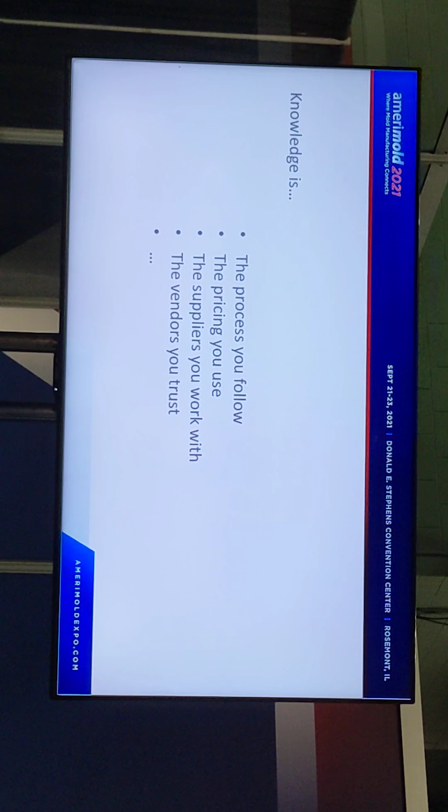So knowledge makes up the process you follow, the pricing you use, it makes up everything. The suppliers you work with and trust. Everything comes from the knowledge you have built over time, the knowledge your bosses have built over time. This is where it all comes from.

Speaking of process, let's talk about process for a minute. Let's say you get a new job. Here we're talking about mold, so we're going to talk about the process of manufacturing a mold. When the mold comes in, you start with the design. That's where every mold starts. You're going to start by having a preliminary design. You're going to review that preliminary design with your customer.

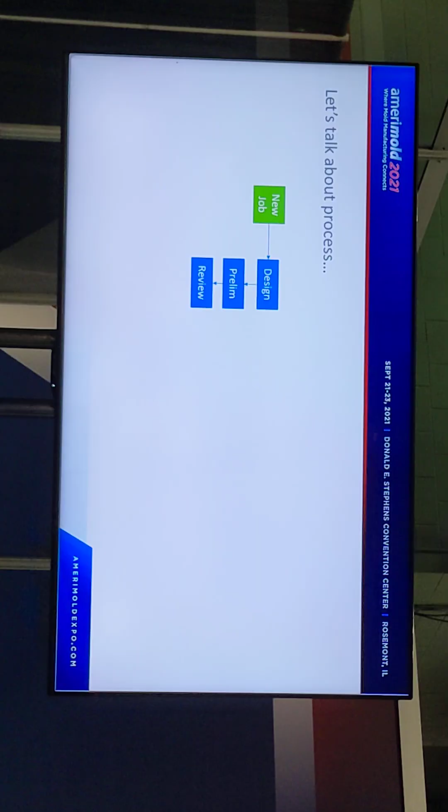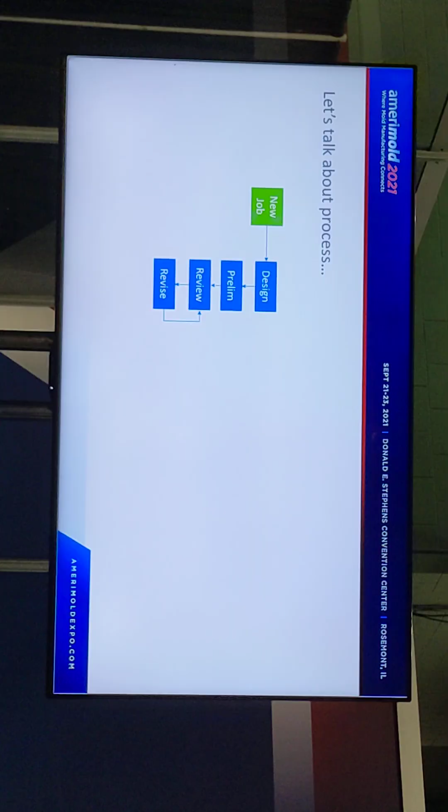Your customer then is going to revise it, because that's what customers do. They can't make up their minds from day 1 to day 2. We all know this. That revision process goes back to a review, then back to a revision process, back to a review, and this runs in a circle for a while until everyone agrees that the design is ready to use. At that point, you get to deliver a design.

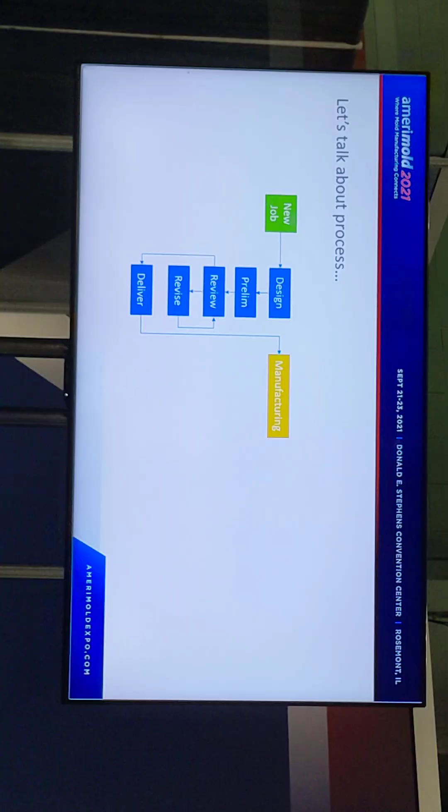Where is that design being delivered? It's being delivered to whoever is manufacturing this mold. It could be your own internal organization. Maybe you are doing this with an external manufacturer, who knows? But in that manufacturing process, and I'm not going to hit all of the points of manufacturing a mold, just big ones, you're starting with ordering materials, ordering your consumables, right?

You are going to prep everything you possibly can for heat treat, get it out to heat treat. You're going to bring that back in, start finished machining, assemble everything, and then, God willing, you're going to deliver. And at the end is a payday. At least that's what we all hope for.

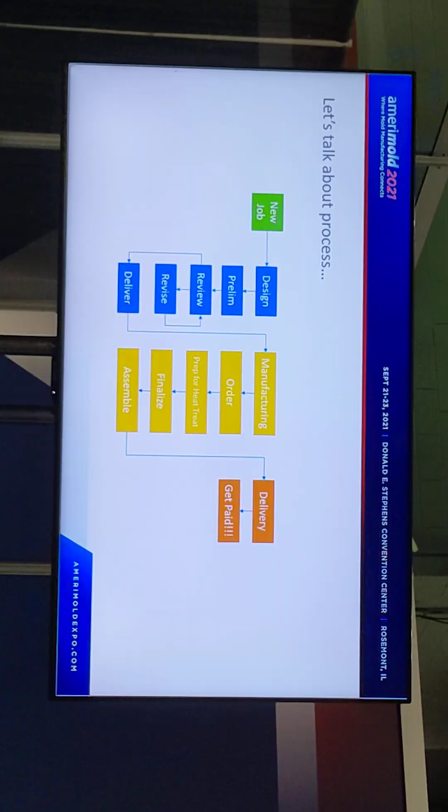We get paid. Now, in reality, what happens in that process when there's a breakdown, when something falls apart? And that's really why we want to talk about automation, because we want to stop simple elements from causing hiccups in that process of start to finish mold making. So let's take another look at this process. Again, we're in this design, right?

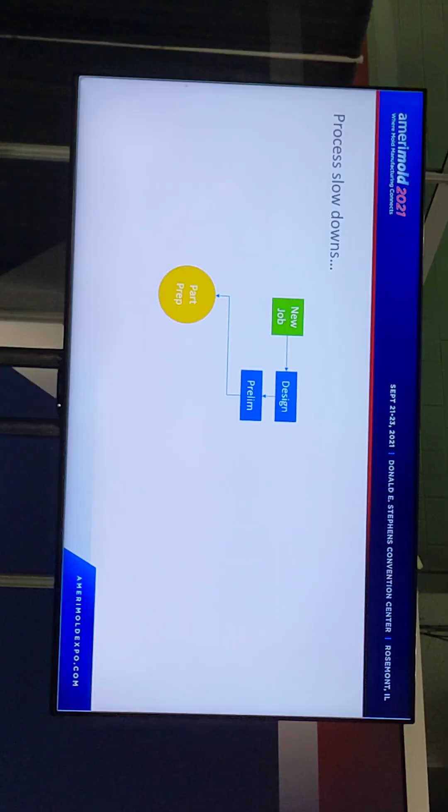Let's break down the preliminary aspects. What do we do when we're doing a preliminary mold design? We start with prepping the part. I don't care who you are. You import data from your client. That data either imports cleanly or it doesn't. You then have to fix the data, or you're checking it, making sure there's proper draft angles on it, it's ready for moldability. You have to make modifications, whatever. This is your preliminary part setup.

After that, you begin developing your core cavity blocks, right? You do the split, you develop the inserts, the sub-inserts, the action inserts, everything that makes up the meat and potatoes of that mold. Once that's done, then the mold design can actually begin.

Now, what do I mean by mold design? I mean the full-on mold design. We're talking your mold bases, your ejector pins, your water lines, everything that goes around the mold to make the mold function. That's where we're going to look with automation today, okay?

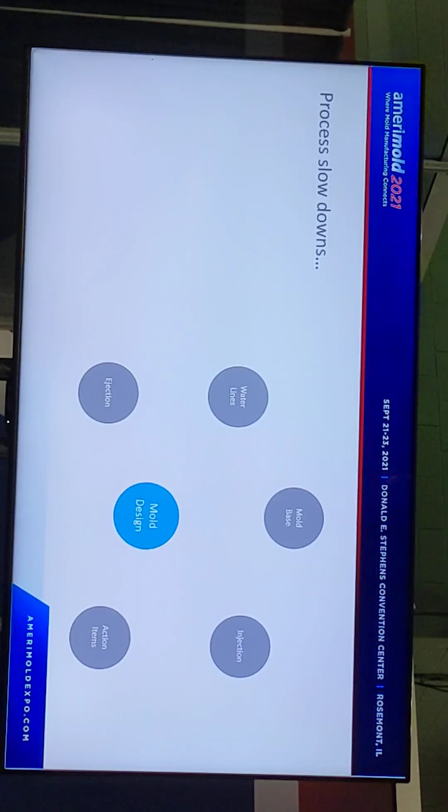So if we take a look at mold design, we break it into a couple of key areas. You have mold base design, you have the injection portion of the design, you have the action items, the ejection side, the water lines, and so on. If you look at each of those objects, each of those individual items have their own idiosyncrasies that you have to follow, right?

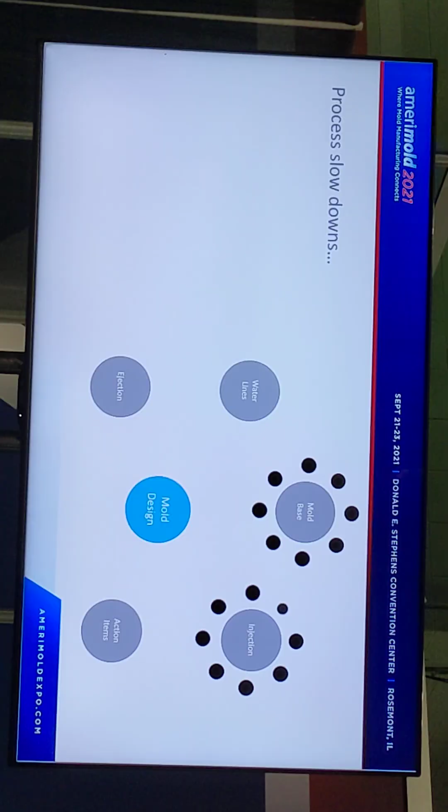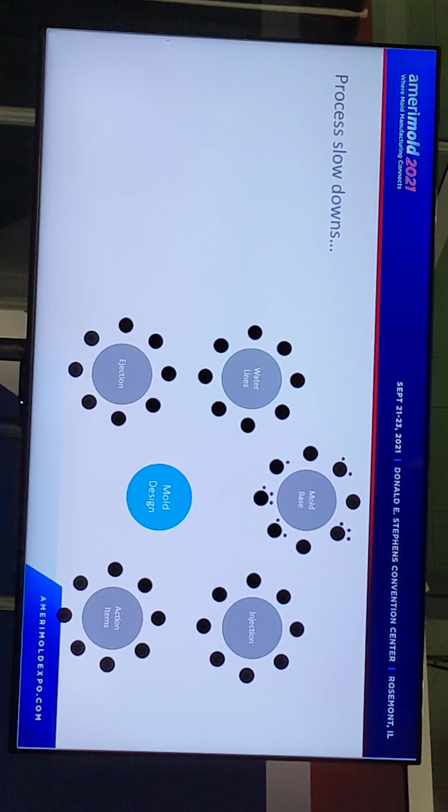So in the mold base, we have to design plate work. With the plate work comes componentry, screws, pins, bushings, things like that. Each of those pins and bushings come with the manufacturing process that's associated with them, right? So all those little things have little idiosyncrasies of their own to deal with. And this is where designs can break down some.

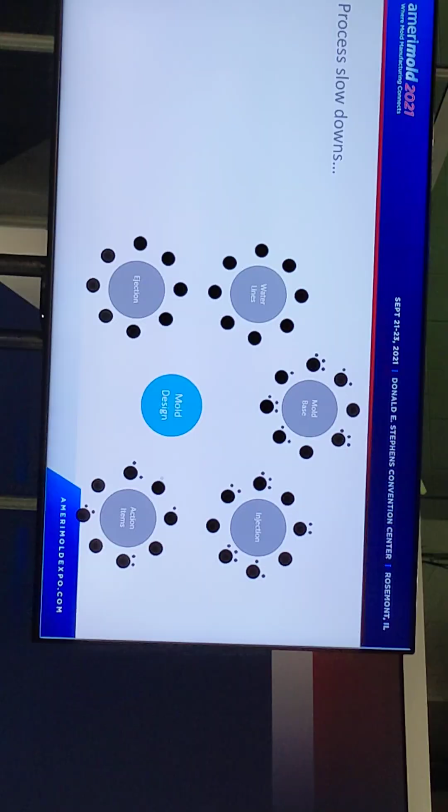Because you'll have designer A that believes they should put this type of clearance on this component, and designer B puts this type of clearance on this component, which leaves the manufacturers on the floor that have to build it with their hands up in the air, not knowing which are the right numbers they should work to, right? And at the end of the day, both designers are right, because it's just clearance.

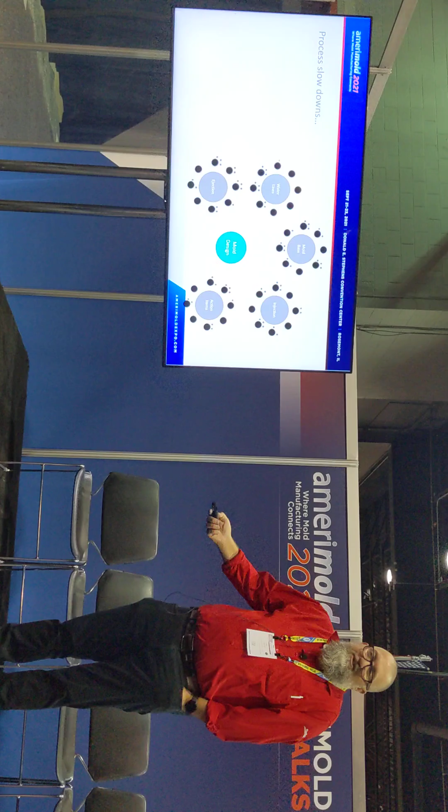What happens now when we enter the world of automation? So now we're going to talk about automation a little bit, how it works and why it works, and why you want to be using something that is capable of automation in your everyday mold design life. Automation should be used to minimize mistakes, right? Or completely remove them. And I'm going to give you some samples here in a few minutes to help you understand what I'm talking about.

It should speed up a given process, minimally, okay? It should remove personal opinions. And yes, I'm saying that every engineer has personal opinions. Every engineering manager has the ultimate opinion. And I'm not picking on any of you guys to be mean. We all have our opinions.

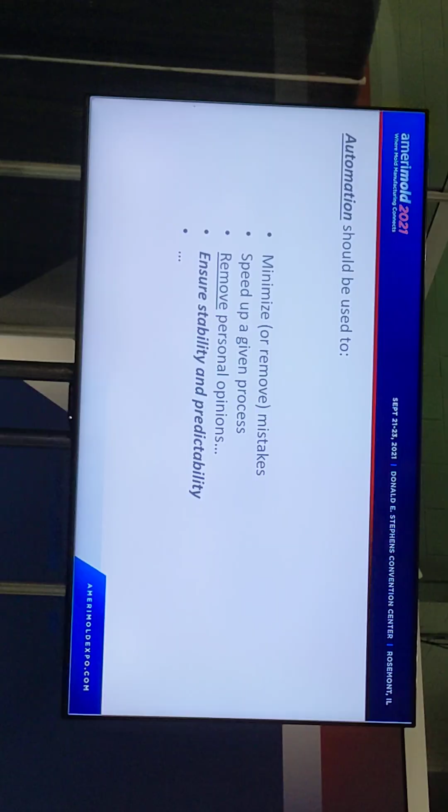But at the end of the day, whose opinion matters? The company. You should be following the company's opinion of how this should be done, period. And focus your engineering talents on the hard aspects of the design, okay? The other thing that's interesting about automation is it ensures stability and predictability. Because if we know these rules are being maintained, we can predict better when we're quoting jobs, right?

Cool. So automation works by capturing company knowledge. There's that word again, right? We have a way of doing something, so we want to capture that and make it reusable. It could be as simple as how an item is positioned in the mold, okay? When I put my stop pins in, I want them positioned like this and this from here, period. That's the way we do it. And moving forward, that's the way we're always going to do it. When clearances are used and so on.

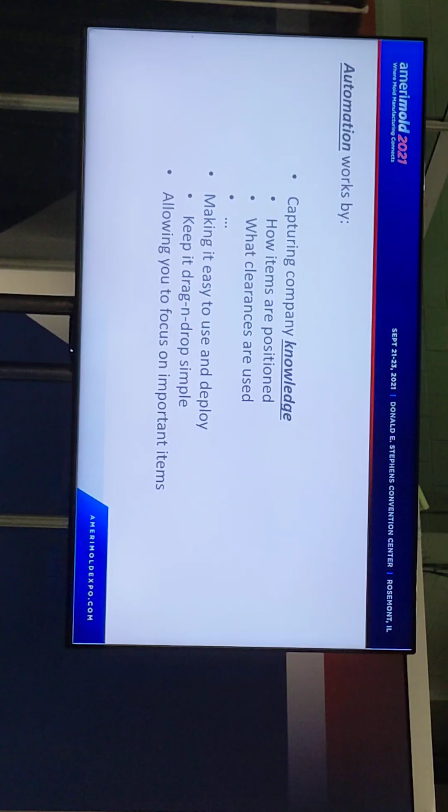It should be made easy to use and deploy. If it's not easy to use and deploy, are your engineers and your employees going to use it? No. They're going to fight you on it. Okay? Now, let's talk about other items that help in automation.

Libraries. I'm sure we all have libraries of things we use in our everyday engineering. For example, here I'm just showing a bunch of libraries of materials. I've gone through in my samples and I said, okay, I use material A, material B, material C, it can be H13, S7, whatever. I have it set with all the properties that we always document, and it's done once and forever. I have the suppliers I order from automatically listed in there, so when I build my bill of material, everything's done, and it's perfect every single time, okay?

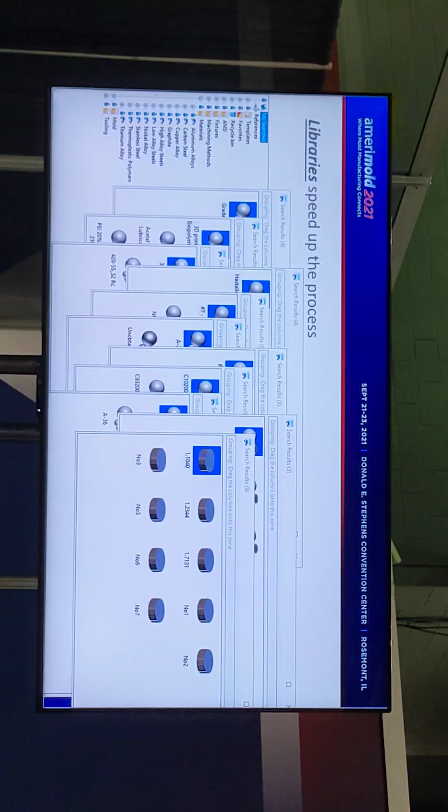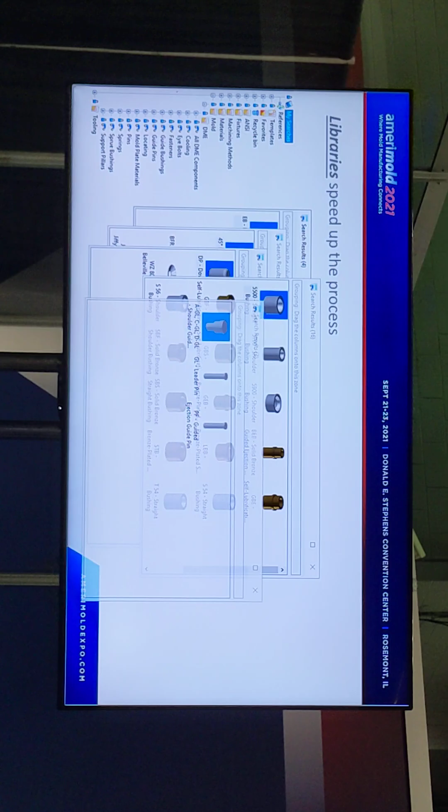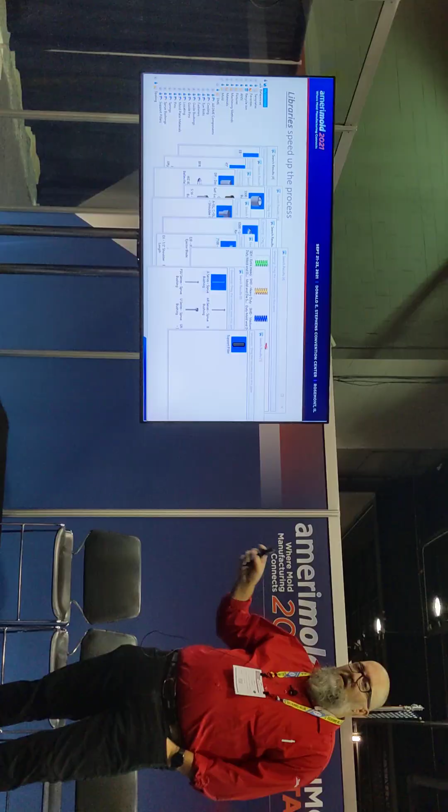We'll talk about screws in depth here in a minute. Then you have libraries linked to a given supplier, and here I think I'm using DME. Could be Hasco, PCS, Progressive, Misumi, whoever you guys use. But you want to have access to these components, and more importantly, to the components' manufacturing processes that are associated with them. We're going to talk about that here in a second as well.

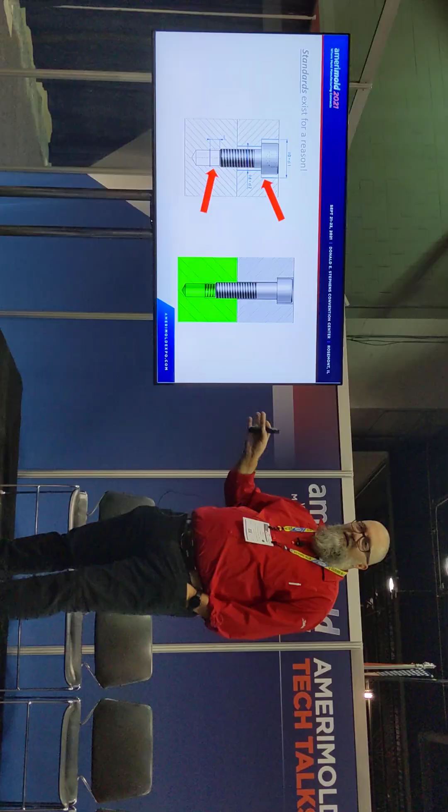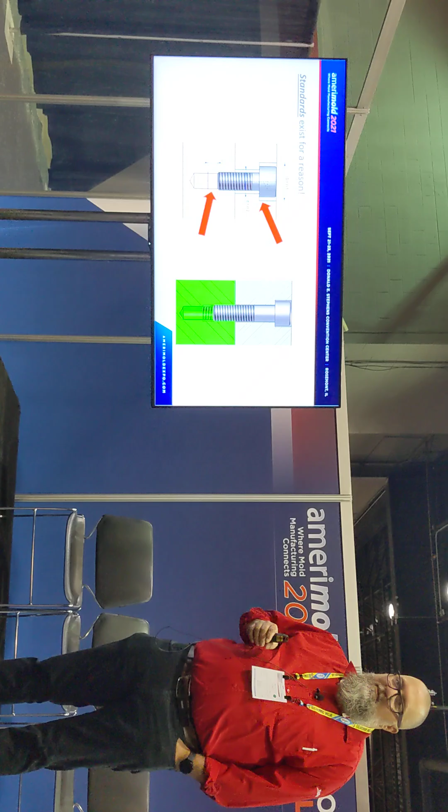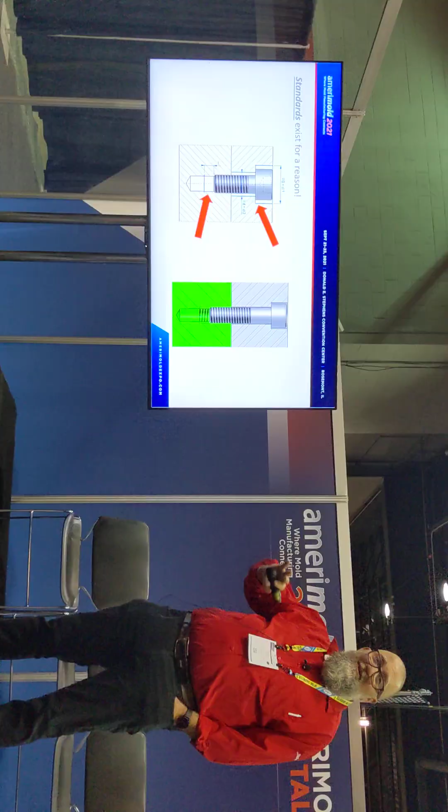So, how many of us have seen this before? Silly question, right? It's a socket head cap screw. It is the basic building block of the mechanical world. How many of us have designed something in the past where we had to type in the clearances for the standard clearance hole, the tap hole diameter, everything, because you had to document this for manufacturing. And this is silly because when's the last time a quarter 20 changed? Or half 13? It hasn't. It's a standard for a reason. So why is it that everyone insists on taking the time of typing this stuff in manually? All that does is add to the time.

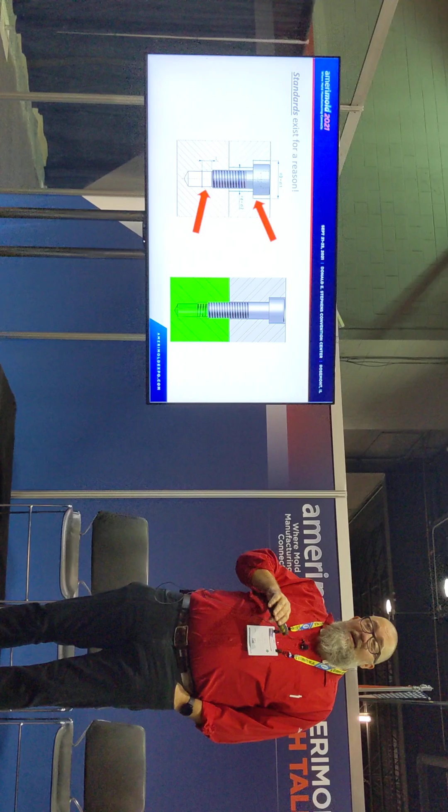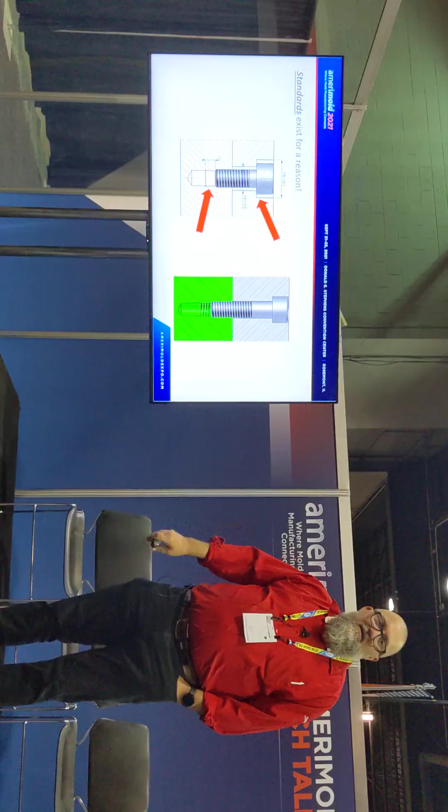What you really want to be doing is thinking about what clearances your company wants to work to. Okay, you can use the standard ANSI or ISO or DIN or AFNOR clearances, or maybe you have your own strategy on how you need to manufacture these things. But set it, forget it, move on. And when you set it and forget it, make sure it's using values that the downstream manufacturing people can actually use. Okay? Don't round values on the engineering side thinking, oh, the guys on the floor, they know what I mean. They may know what you mean, but their automated software sure as hell won't. Right? So let's have a look.

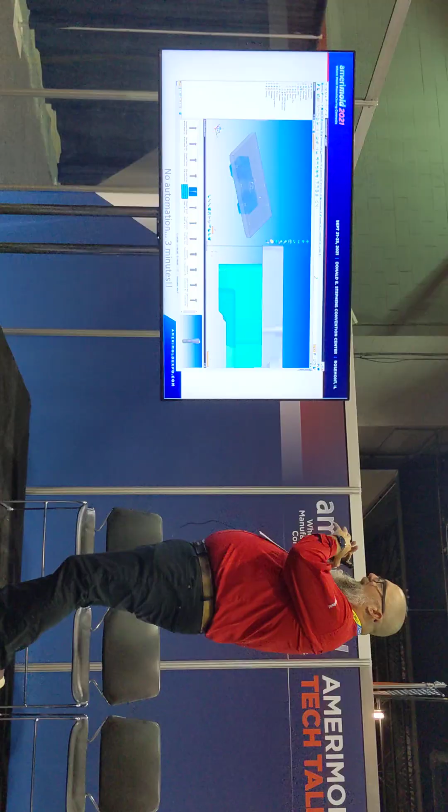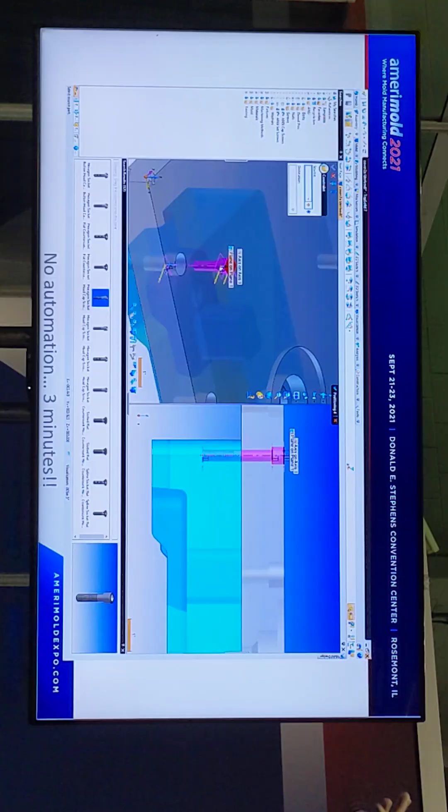So in this video, I'm going to show you adding a screw with no automation. Okay? And it's pretty exciting. You're going to see what engineers do today in most engineering environments. If they have access to a library, they're finding their component, they include it in their assembly, and now they're going to start positioning it. And this is super duper exciting, right? It's not. We've all seen this type of work before. At the end of the day, what's happening is, you can see, positioning is happening. I'm orienting my screw. I'm going to select the correct length for this. Okay? This process is going to take about 3 minutes. It's a good thing you guys are sitting because it's extremely boring to watch.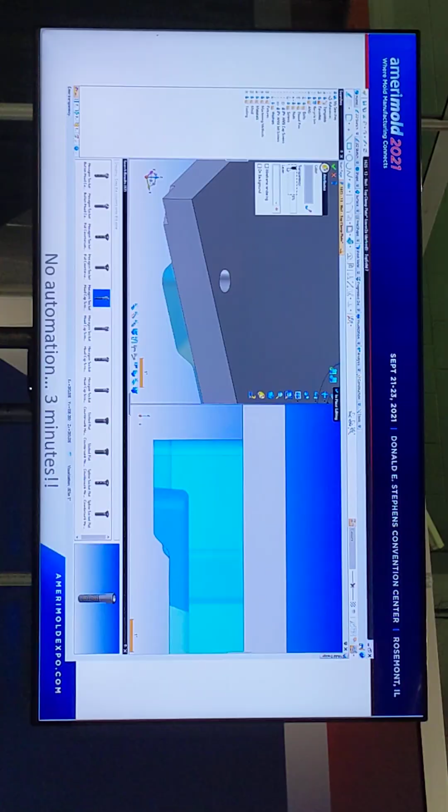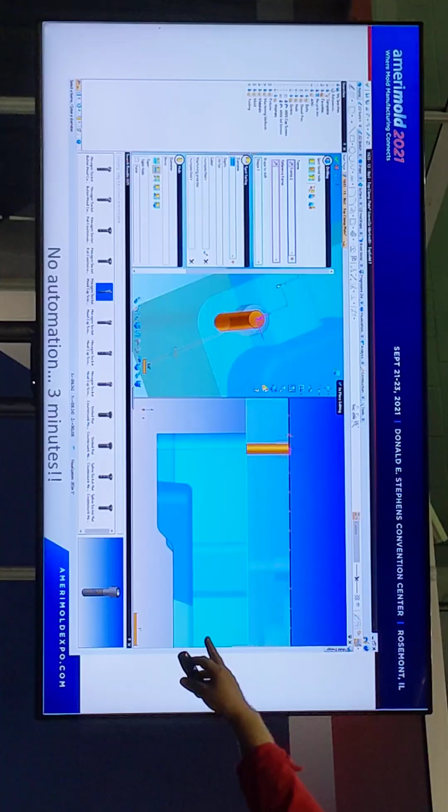At the end of the day, once this is positioned, that's great for the component, so that'll update our bill of material, but now we have to go and modify each and every plate that screw passes through. Okay? Depending on the software you're using, you have to maybe remember what the right counterbore hole diameter is for that size screw. And you have to remember what the right clearance hole is, what the right tap diameter is, and so forth and so on. And here you can see, it's exactly what I'm showing. It's a manual process. This is one screw in a design. How many screws go into a typical mold design? 200? 400? It's quite a big number, right? And so if we take a look at what I wrote down here, it's 3 minutes to do this process for an experienced user. That's a long time to add a screw.

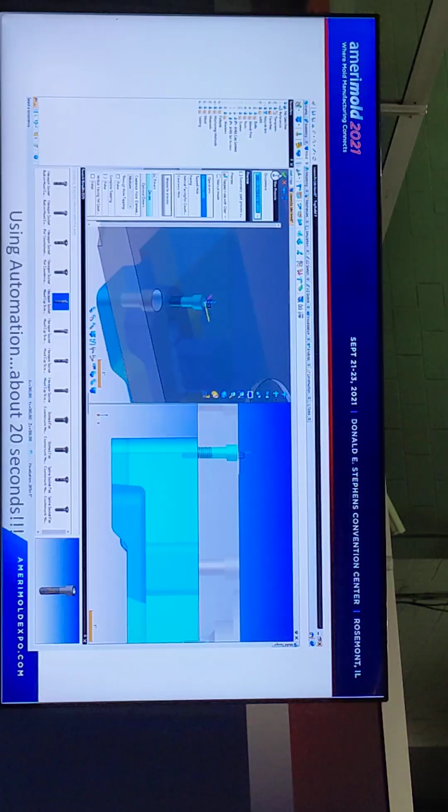Now, let's look at it using automation. So if you use automation and you capture your manufacturing process in it, your user should be able to more quickly locate and identify the screw. So here, I'm positioning it right off the center of my cavity block, off the back face of the plate there. I select the face I want to attach it to. The software automatically picked the right length. I click OK. The clearance holes are in, the drillings are done. It took 20 seconds. I'm not a smart man, but 20 seconds seems faster than 3 minutes, right?

Let's take it to the next level. What about making a change? Because again, remember those changes? Engineering manager comes in, the customer comes in, whatever. You know, Bill, why did you use this size screw? I don't know, it seemed good. So you have to change it. In a non-automated environment, okay, you're gonna go make that change.

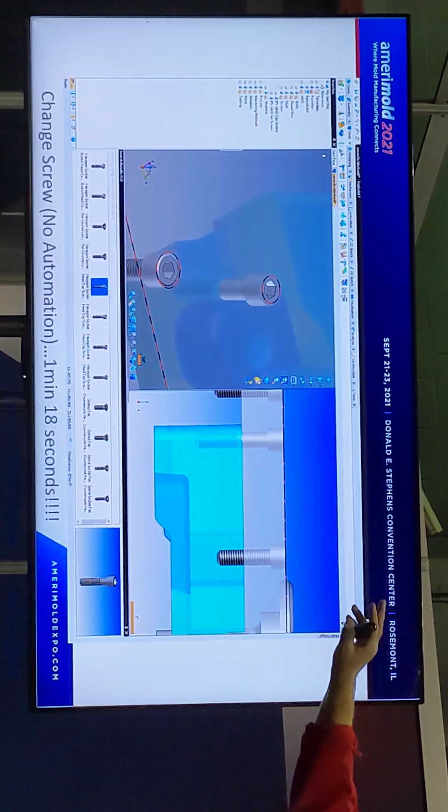It takes 1 minute and 18 seconds to go pick the new library component and then go manually update the correct drilling sizes. And is this a good use of an engineer's time, right? Again, we're just dealing with socket head cap screws here. It is not exciting. Nobody wants to be a designer to put socket head cap screws into a design.

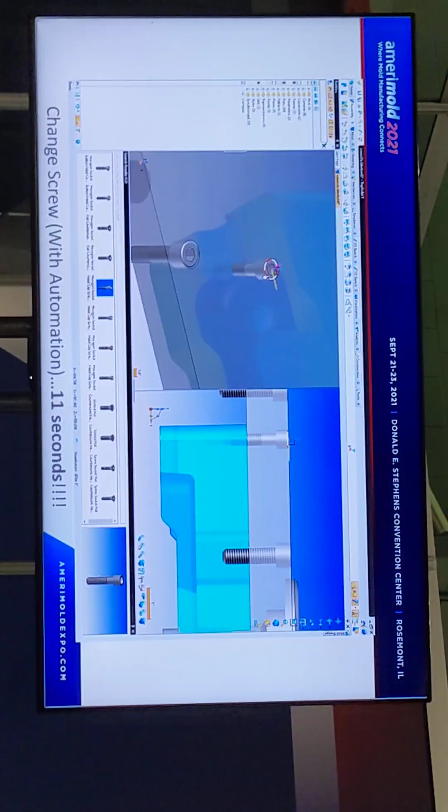So, let's look at the automation side. You can see the increase right there. It's 11 seconds. All I'm going to do here is come in and choose the different diameter I want. The automation is capturing, because it already knows the thickness of the plate, it knows everything. It has everything it needs. All it has to do is change the sizes and the clearances and the drillings. 11 seconds, a little bit faster.

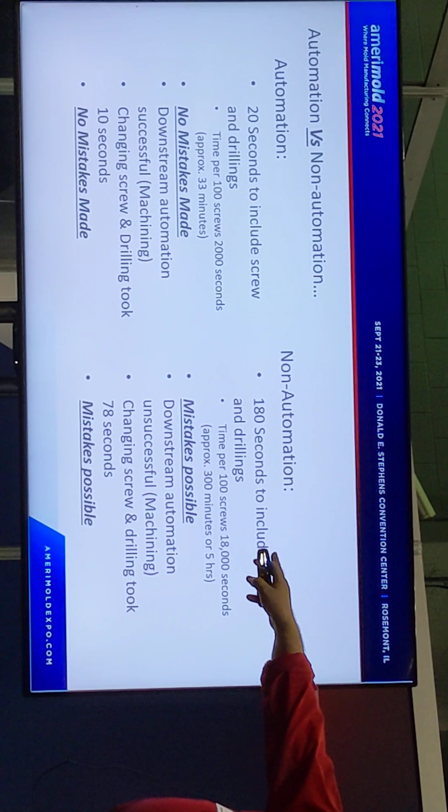Again, let's talk about the reality of mold design now. So, in an automated world, 20 seconds to include a screw versus 180 seconds. Okay? If we take 100 screws in a given design, you have 2,000 seconds or 33 minutes worth of work using automation against 18,000 seconds or approximately 5 hours of engineering time on screws alone.

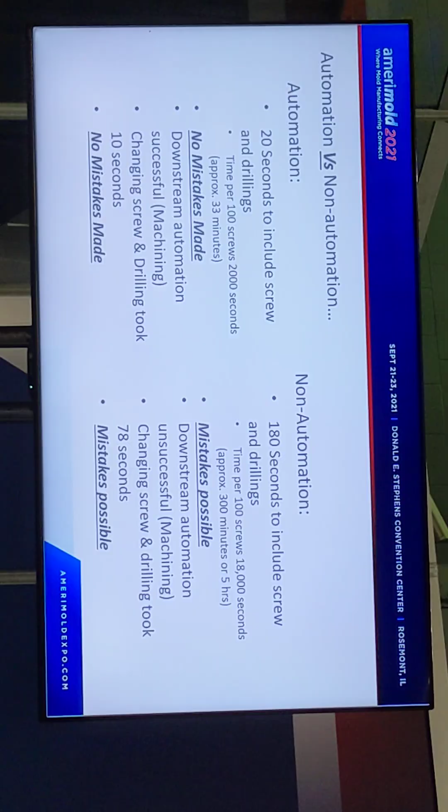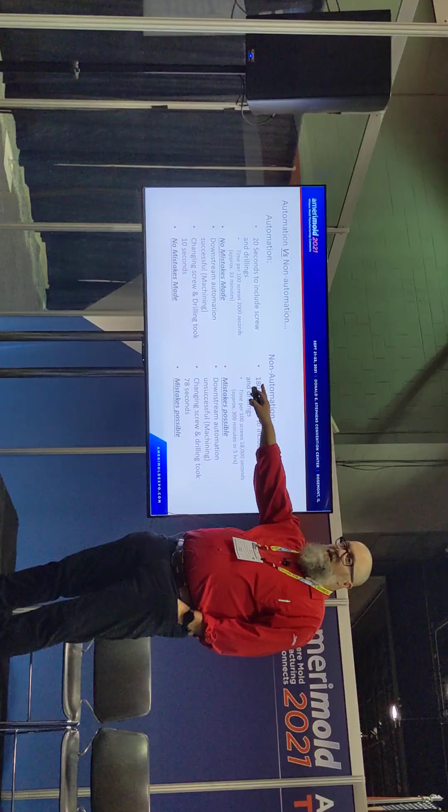Nobody wants to think of this when they're thinking about mold design. They don't want to think my engineers are wasting 5 hours putting screws into the design. But guess what? It's the reality when you are not using an automated platform. Okay? And again, carry it downstream. When you're in an automated world, chances of mistakes being made are very slim, next to no mistakes. When you're in a non-automated world, mistakes are possible, right? Because we're human, and we can fat finger numbers with the best of them.

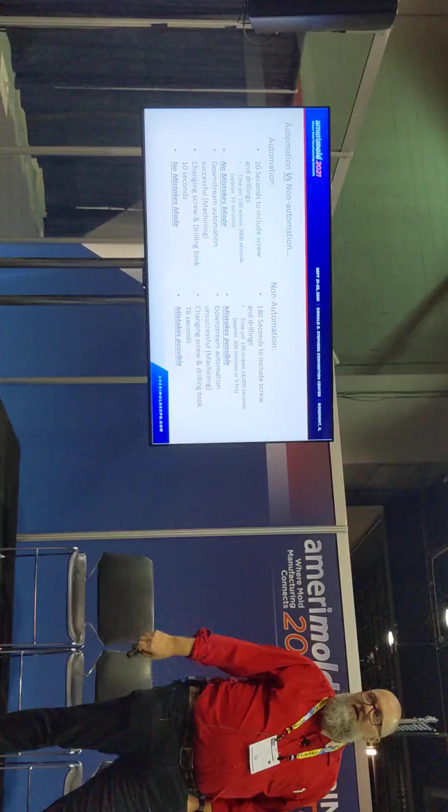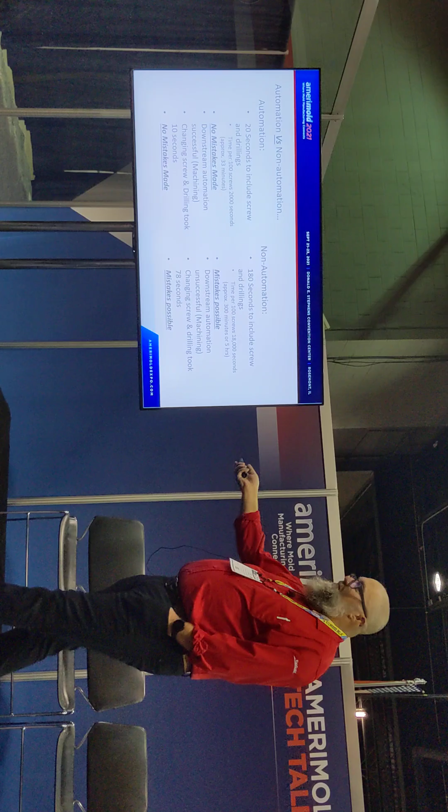Carry it forward into downstream automation for machining. If the numbers are correct in engineering, the numbers are correct in machining. No problems. If the numbers are wrong in engineering, the numbers are wrong in machining, that's a costly problem. Okay? And again, the amount of time it takes to change, 10 seconds versus 78 seconds for single components. Clearly, automation wins.

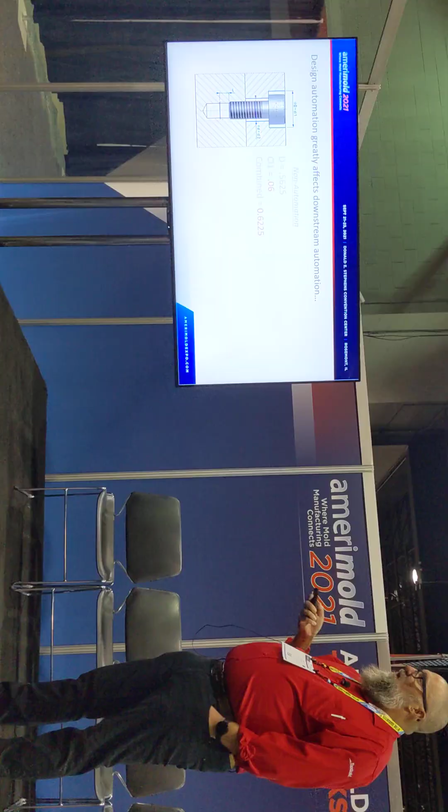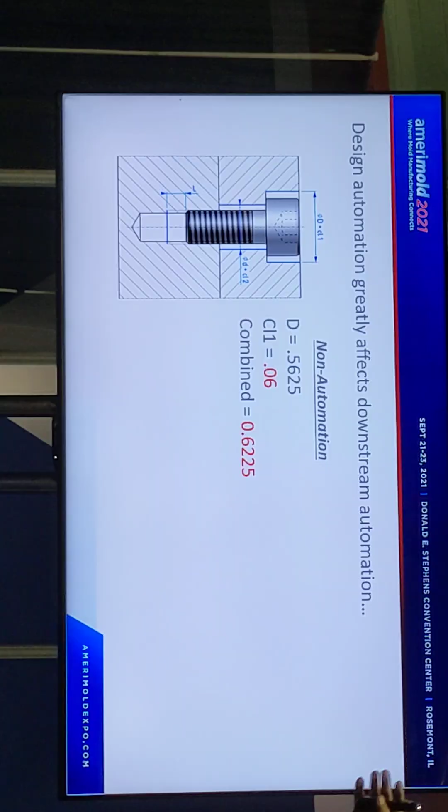Now, let's talk about that downstream automation side. And again, here, I pick on our clients all the time. When they send us files, they send it to our support system. I pick on them all the time for being lazy with the clearances they enter. On our diameter here, we're going to say that's that size. We're adding 60 thousandths to it. The result is 0.6225. Is there a standard drill for that?

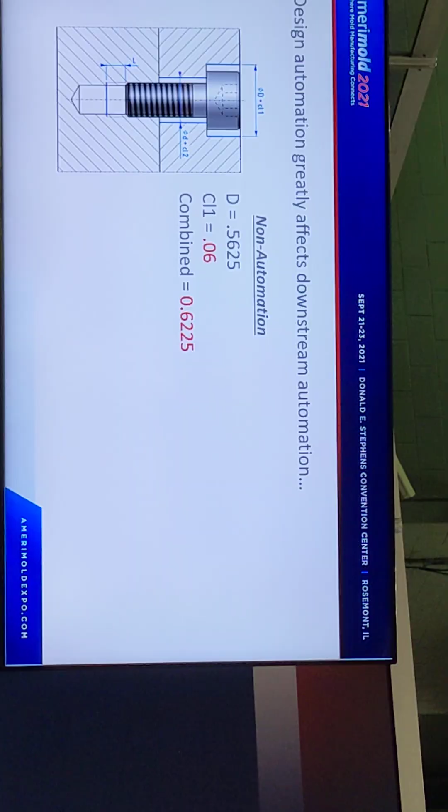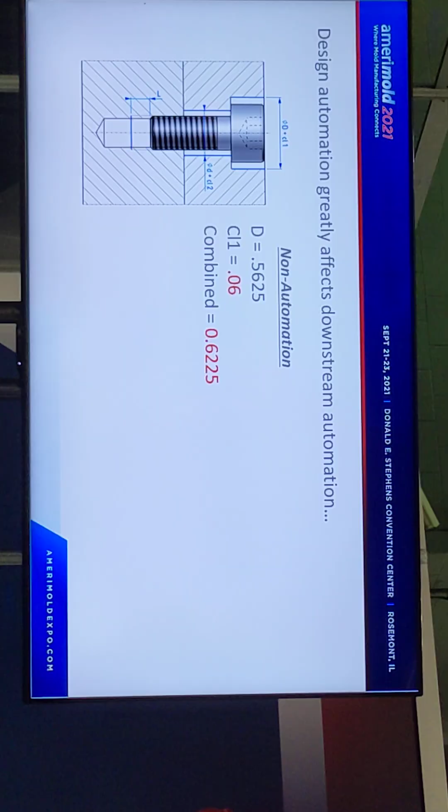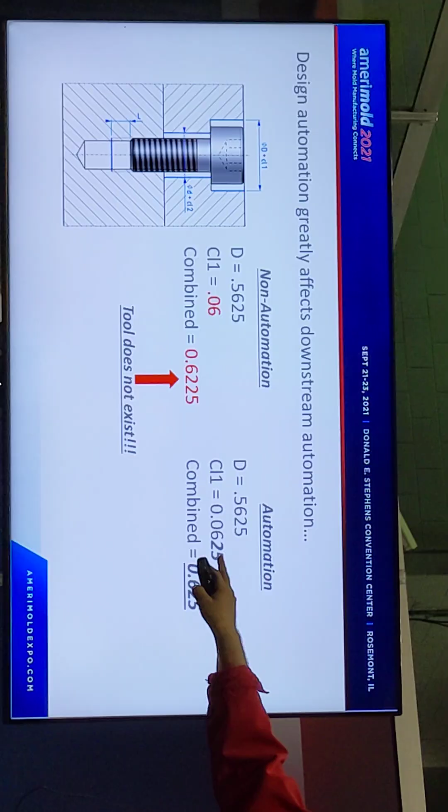No. So when you run automated drilling in any CAM software that's looking for that diameter drill, it's going to fail. And it's because the engineer meant a 16th, but they just typed those 60 because the guys on the floor, they know. They understand what we're saying. Okay? It's a very old school way of thinking. So, what happens if we actually take the half a second to add the missing 2 digits? You have a real number at the end. The downstream automation works.

And it takes no more effort to do this. You just have to care to type in the real value, okay? Every software out there lets you do math with it. That's what they are, the big visual calculators. If you don't want to type the decimal in, type the fraction. That way you get the real math, and then math works.

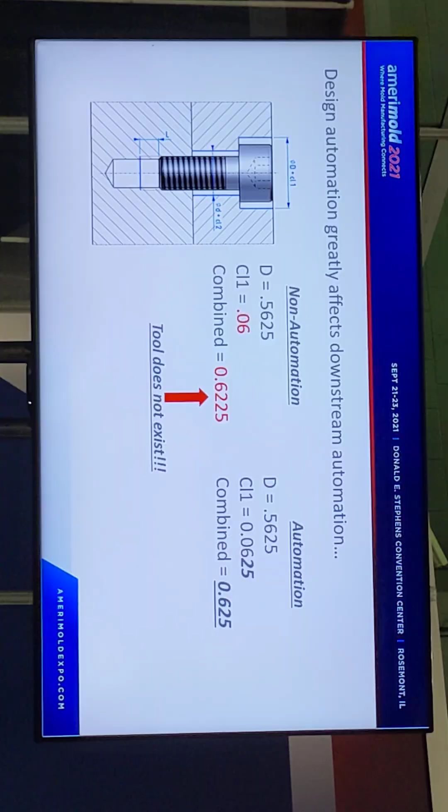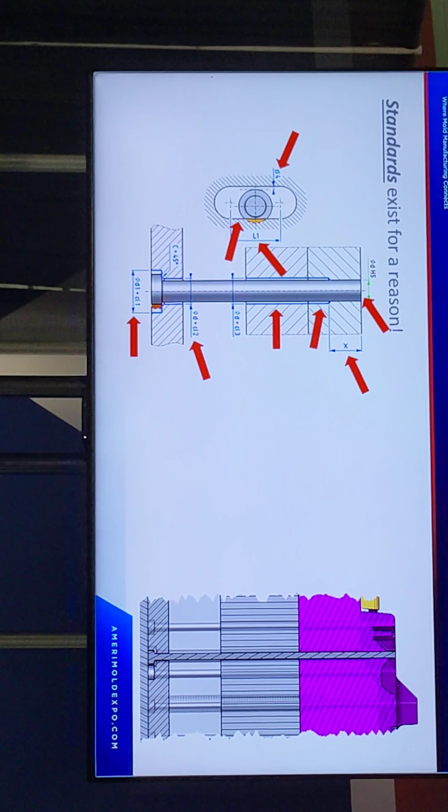Now, I have one more sample for you. We've all seen ejector pins, right? So aside from the cap screw, there's not a lot going on in that. There's a couple of drillings you got to do. On an ejector pin, however, there's like 8 to 12 different things going on. You got different clearances through all the plates.

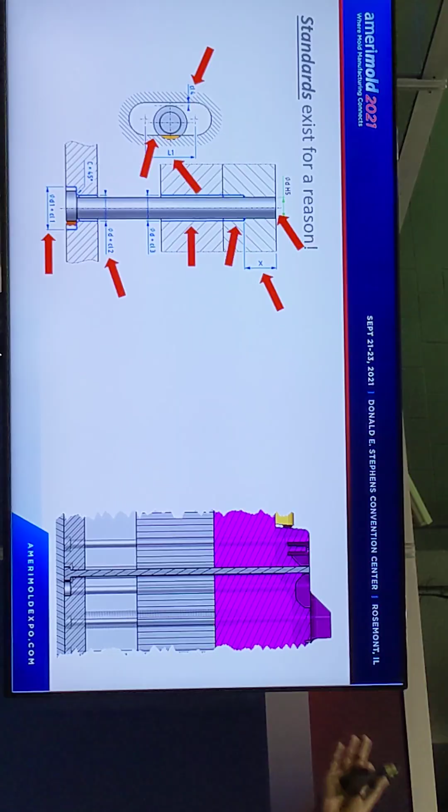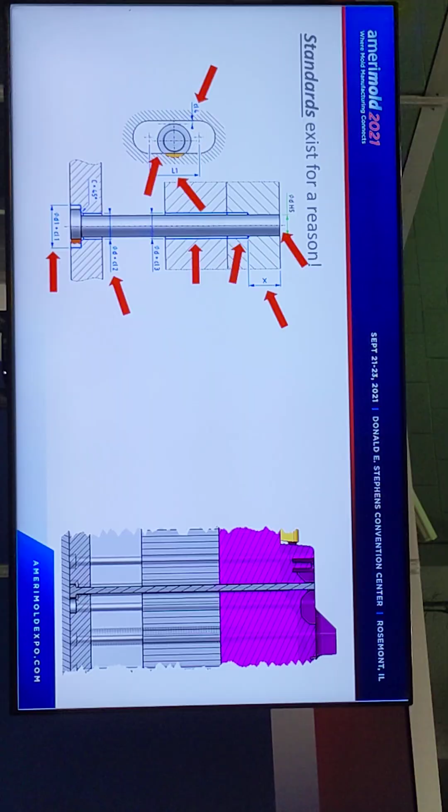You have to trim that pin to the molding detail. You have to key the pin if it's needed to key it, right? You have to put in the correct pin travel. You have clearances on this plate, down on here, down on here. You can see everywhere I'm pointing is another area where an engineer would have to make a decision. And depending on the number of plates you're passing through, that may increase. In an automated world, let's see what the possibility can be.

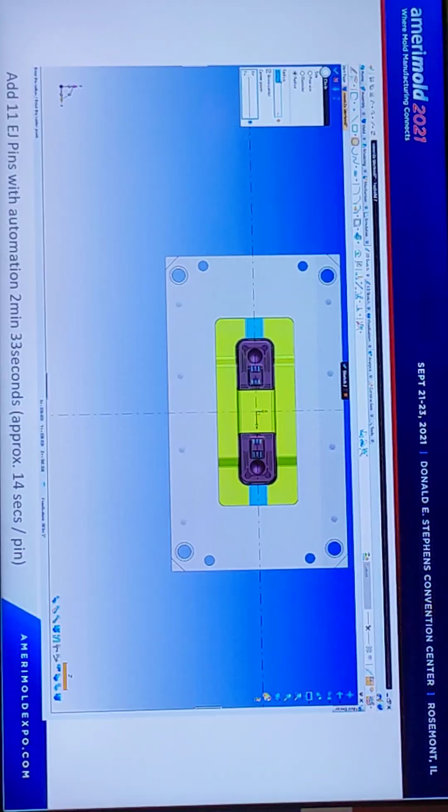So, in this sample, what I'm doing is I'm going to include ejector pins into this design, okay? When I include the ejector pins into the design, I'm doing it in a logical way. When you're thinking as a mold designer, okay, it's time to put in my ejection, the first thing every mold designer does, they want to plan view and they start drawing 2D circles. Why? Because 2D circles are efficient.

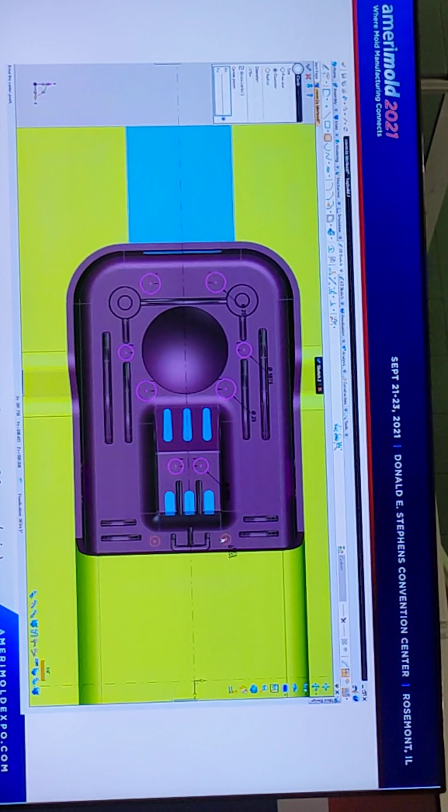It's fast. What's up, big guy? It's fast. You can identify very quickly where you need to put things. Once the 2D circles are in, you constrain them. You have a meeting about them. You all shake hands, high five, do whatever it is your company does to sign off on the process that is your ejection. And then at the end of the day, we'll see what automation does.

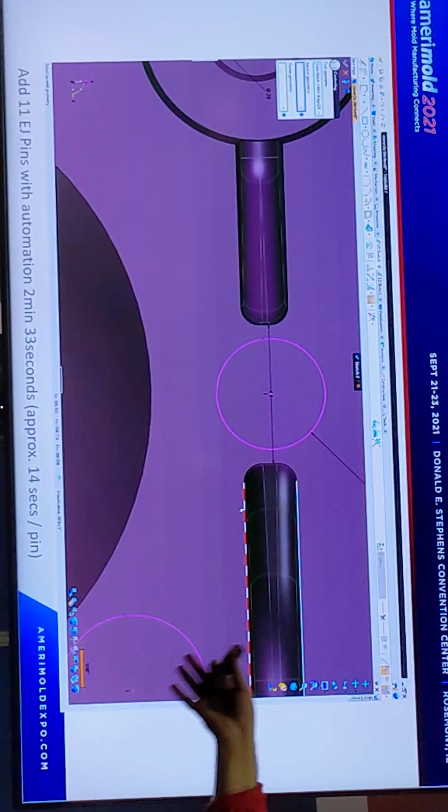So here real quick, again, just to show off a couple of fun things. Here were some geometric rules. Again, you still are going to be a designer. You still want to say, okay, I'm worried about these ribs, they're going to stick, so I'm going to center a pin right there. I'm going to add some dimensions here. I'm going to make sure I type in real values, because then it's really documentable.

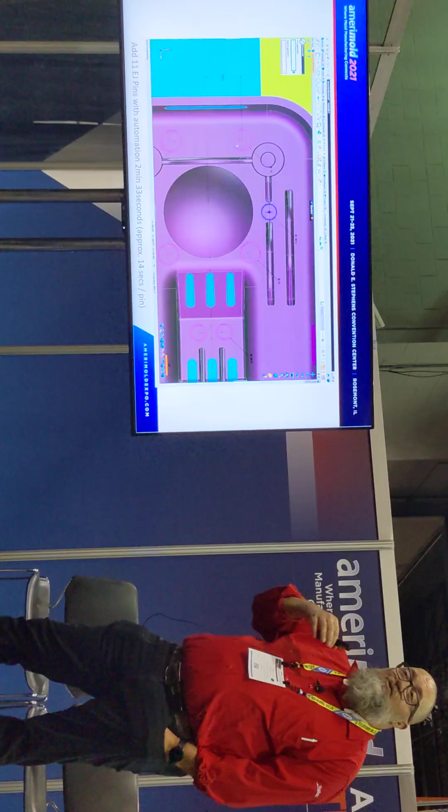Okay, is that a word, documentable? Anyway, so off we go.

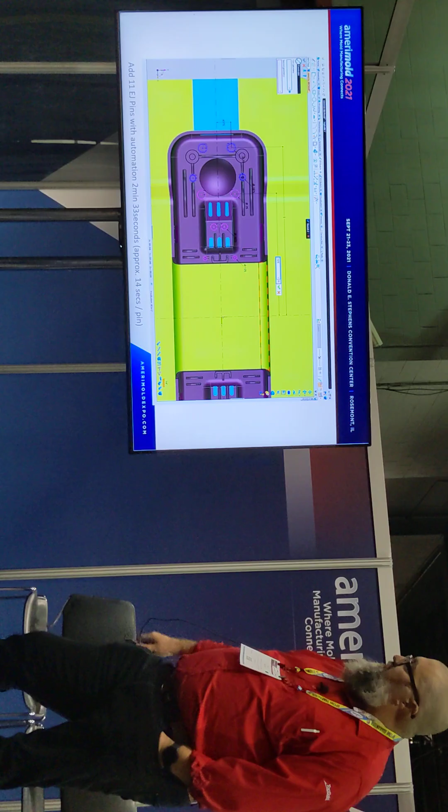I think this goes on for just another second or two. And then we're going to go ahead and get the ejector pins in. At the end of the day, I think this is what makes the process simple. Remember at the beginning of my slides where I said you have to keep it easy? Anyone can draw a circle. This is easy to wrap your heads around. Not anyone can insert complex 3D components.

Joe has a problem with circles, sometimes.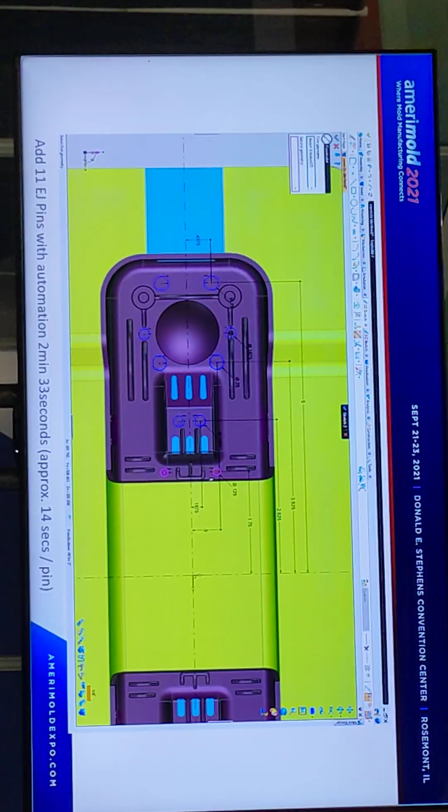All right, here we go. Here's our last set of circles. Lovely. All right, so once that's constrained, we're going to validate your sketch. Actually, I changed my mind. I'm going to put one more in right here. Give a nice big 3D detail right there.

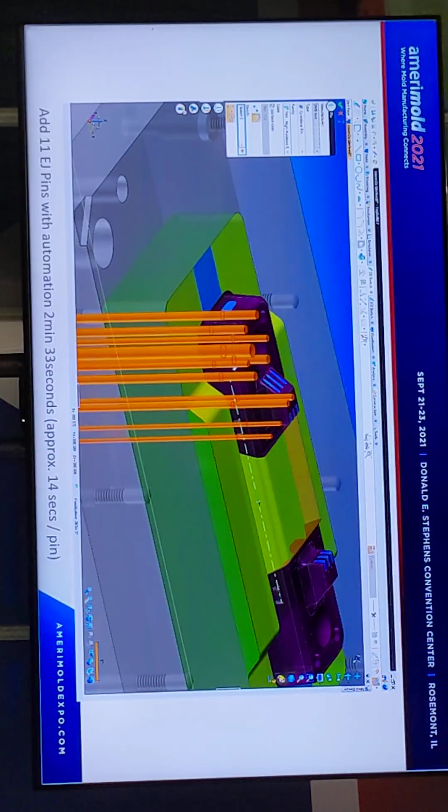The other thing automation should do for you when it comes to ejection is, I talked about keying, right? The system should be smart enough to look at the geometry. Here we go. Here comes the pins. Boom. And it should trim the pin automatically to the 3D details. It should automatically determine if they need to be keyed, right? So this process, we're putting 11 pins in, this process should happen instantly and effortlessly. This is why automation exists.

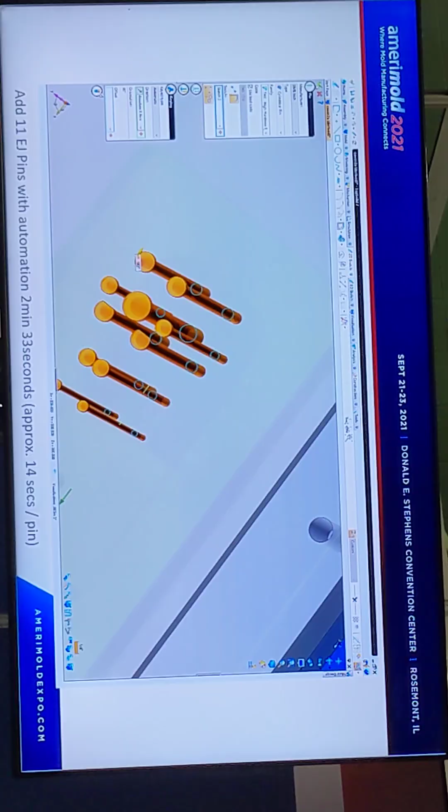When we click OK, the next thing it's going to do is put all of these drillings in. And again, it's using our company knowledge. Once that's done, you're done. Now, what's interesting here, this video is about 2 minutes and 33 seconds long, or 14 seconds a pin. It's 11 pins. Imagine a mold design that has 300 pins. If you're doing it pin by pin, I bet you it takes longer than this, right?

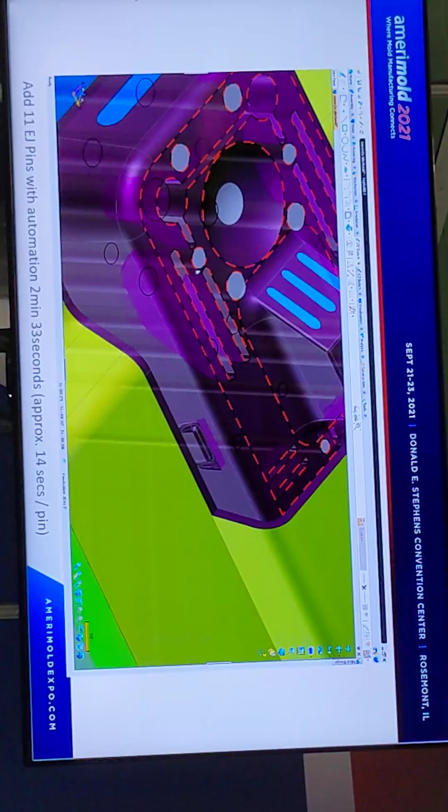And at the end of the day, again, is putting ejector pins in the exciting part of mold design? No. It's another component that has to be dealt with. And that's the idea. This is really what I want to come across with automation. There are many things that can be automated in the world of mold design, whether it's standard components from standard suppliers to your own processes.

Many of our customers around the world, they have their own ways of doing side actions or lifter assemblies or mold straps or whatever. They have their company standard. They take the time, teach it to their software, our software in this case, capture the manufacturing process that goes with it, maybe it's a pocket, some drilling, some clearances, so that it takes seconds to include those objects. Not half a day, not all day. Let your designers work on the things that matter.

That's it, that's all I got to say. Does this make sense to everybody? Is everyone using an automated process today? Should be if you're not.